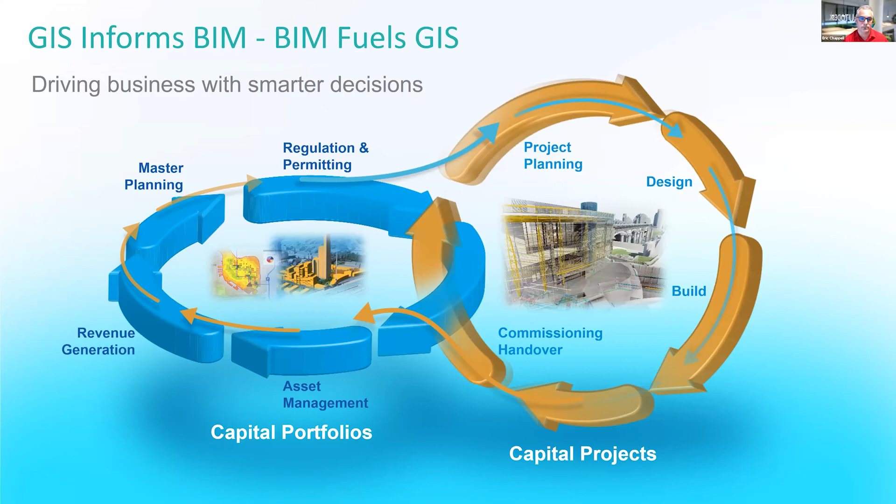Now let's talk about integrations between Autodesk and SBS. It's a different model because we have a tight and close developer partnership with SBS, and their products are built on Autodesk technology. For example, Automated Utility Design, AUD, has AutoCAD at its core, while Substation Design Suite has Autodesk Inventor.

These products also integrate with Autodesk Vault for data management. So for that reason, our solutions are naturally tightly integrated, and SBS can produce files and models that can be directly opened and edited with Autodesk products and vice versa. And we'll be actually showing that shortly.

I'm going to turn it back over to Matt now to talk about some of these integrations from the perspective of Esri. Take it away, Matt.

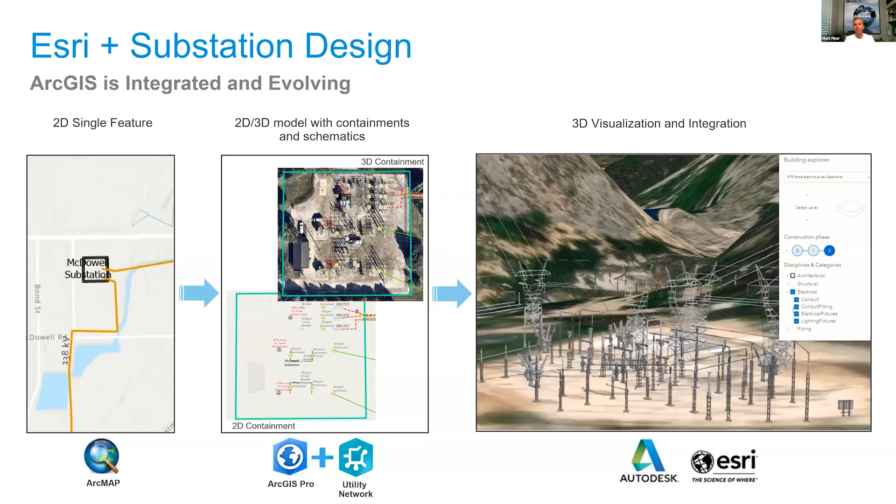This not only allows us to see the design in context to the surroundings, but you can also interact and toggle on layers and look at the different phases of the construction plans. This creates a whole new experience for GIS users and works for assets both above and below the ground.

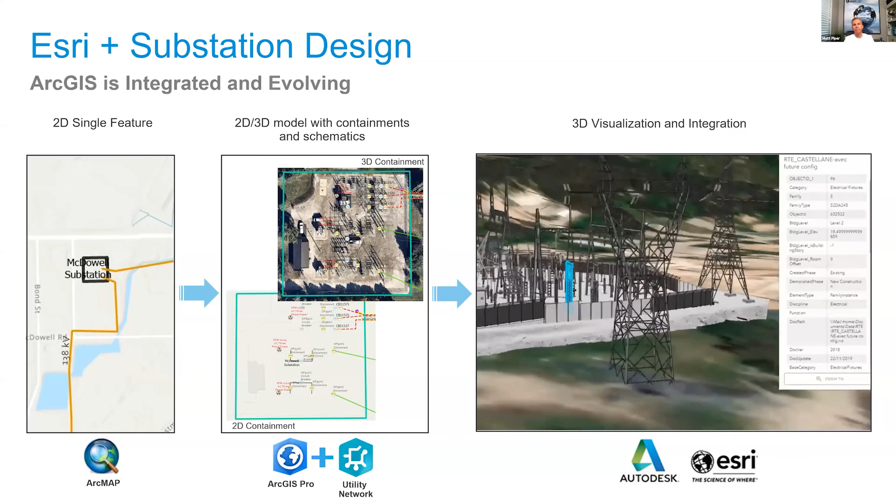One of the things I personally like is that it also honors all the attributes of your design, so users can select the assets and see the associated details, above and below the ground. What you're seeing is the two technologies coming together to greatly streamline many of these business substation and design workflows. It's really exciting stuff.

So we move to the next slide. What we have here is a simple example showing the work that can be done to bring these applications together. Autodesk has created connectors for Civil 3D and InfraWorks showing bi-directional connections. The result is that Autodesk solutions for engineering and design are now connected with Esri's ArcGIS Online and Enterprise solutions.

In addition, our work together has led to significant improvements in how we bring in Revit files through ArcGIS Pro, which is what you just saw in that 3D scene. Most recently, we're bringing in Civil 3D drawings in a much more powerful way, as we're now able to bring in the object, the attributes, and understand that Civil 3D BIM data in the GIS.

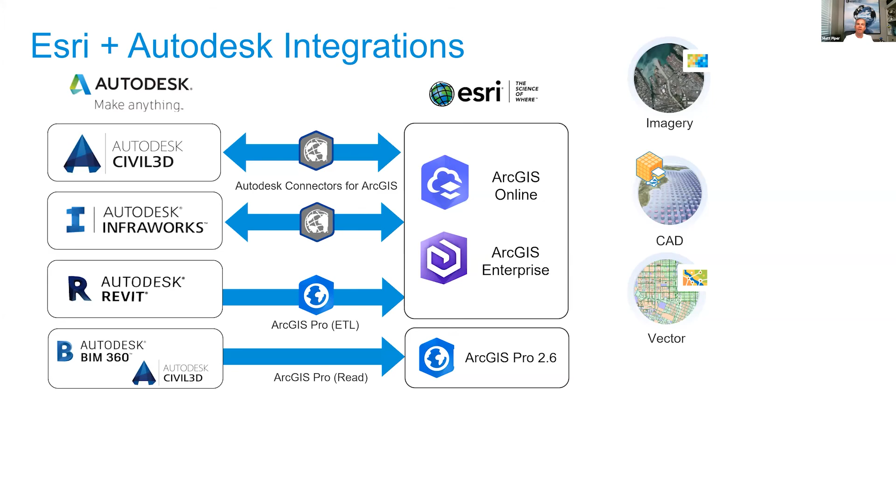But it doesn't stop there. If we look at the next slide, what's coming in 2021 is a new offering called ArcGIS GeoBIM. This creates a cloud-to-cloud connection between our two companies, giving users a direct connection between our two cloud platforms, opening the door for many powerful collaborations and productivity workflows.

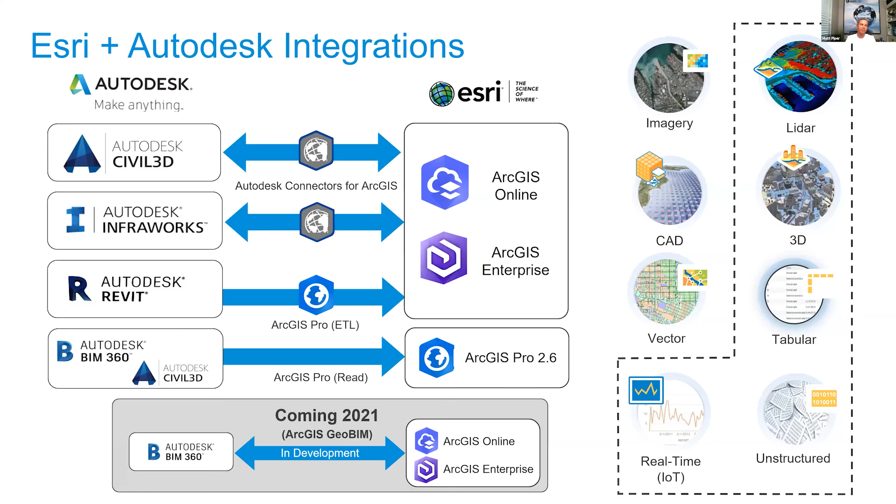So the next slide, we're just going to cover the integration that Esri has with our partner SBS as well. SBS is a partner of Esri, and they've extended the core capability to further streamline the design process as it relates to that utility network I discussed, and all the associated analytics and insights. Much of what our customers are asking for is about understanding the network, and more we are seeing customers look to understand it through 3D representations, this digital twin of what they see in the real world.

So I'm going to hand it over now to Dennis, who's going to take us through some more details of the SBS capabilities. Over to you, Dennis.

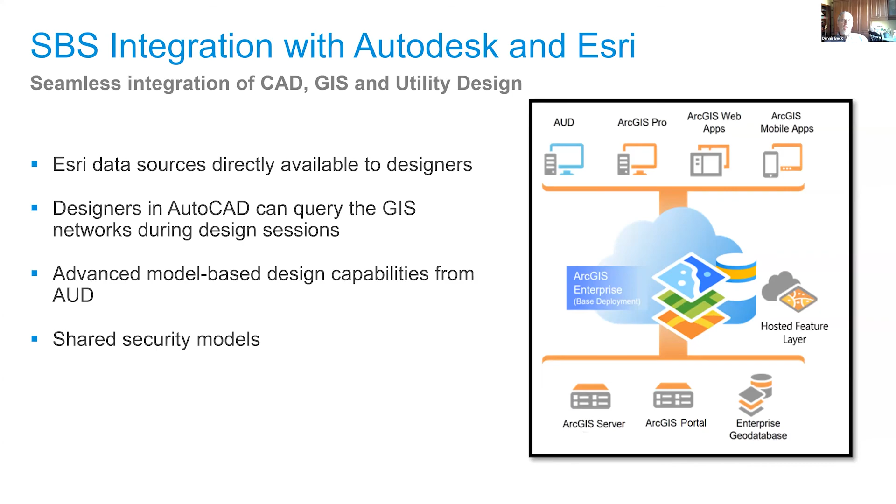And then coming out of this, very critical is also the ability to have the appropriate security and support for it. So the big question is, what does that mean for me? Well, once this information is available, it really opens up the door to a lot of things.

When Autodesk and Esri put this strategic partnership together, I know a lot of the interest was around smart cities and the urbanization happening globally. But from a utility standpoint, the data you have becomes very current and rich, supporting operational activities like dynamic networks and smart grid and those advanced network applications.

All will have a robust data representation that can support taking the utility business to the next level and enabling modernization. Coming out of this community, you've seen a lot about BIM. Esri has a very robust set of mobile capabilities, and all that gets much more enabled. When we look at the benefits of intelligent design and 3D modeling, which is what this session is all about, it really means taking better designs out to the field, having better construction.

And that's where a lot of the justification comes. If you can just shave a few percentage points off construction costs, if you can get your spend in earlier, you're making dramatic changes to the financial performance of your utility organizations.

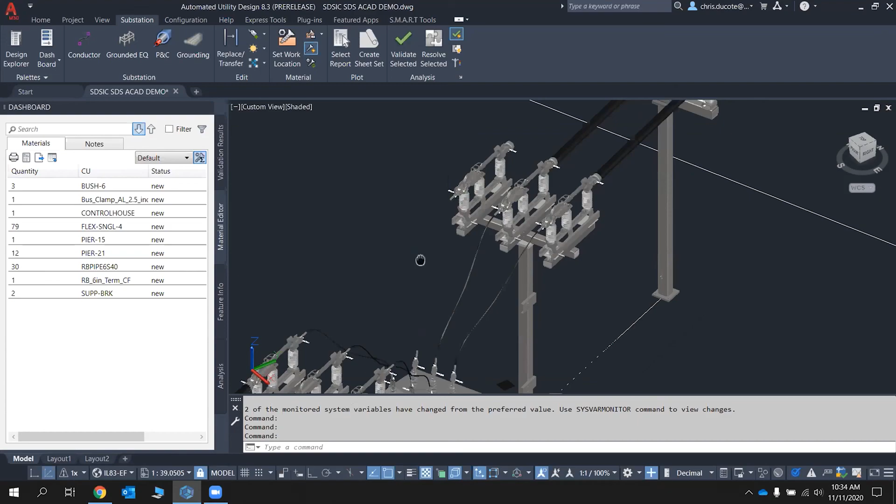This is SDS Physical for AutoCAD, what we're looking at here. This is our new product we've been working on. I'm just going to demonstrate a couple workflows here. This is where we're actually going to put the substation design together. So I've got a couple things left to do here - I need to run a flexible conductor here and a rigid conductor from the switch to that bus support stand.

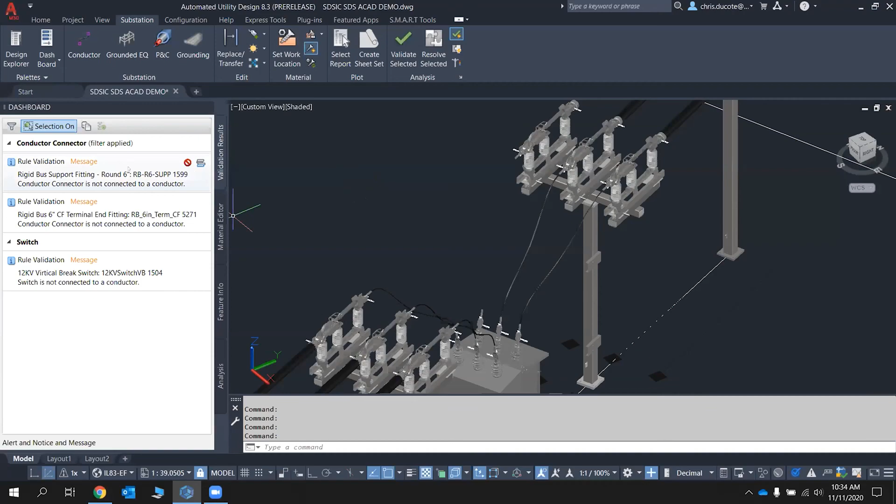Now you'll see here, I have a bill of material here that this is all model based. So once it's modeled and in the design, it's going to be counted accurately. Now part of the power of this is we have true connectivity. We have design checks that we can run. So what it's telling me here, it's picking up that there are open ends in the design - it's telling me that there are things that are not connected. So I'm going to go ahead and connect these.

So here I'm choosing my flexible conductor. We'll see it's created that conductor for me. Now notice also it's giving me a preview - it's picking up, it knows what it's connecting to.

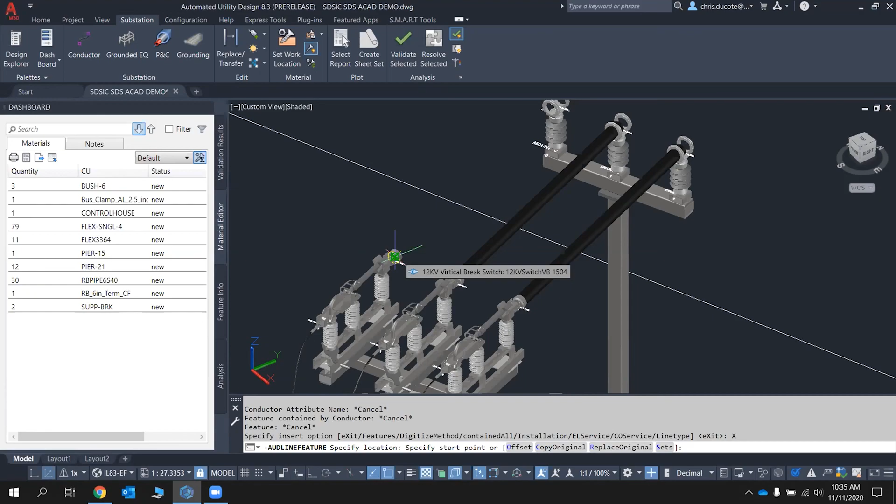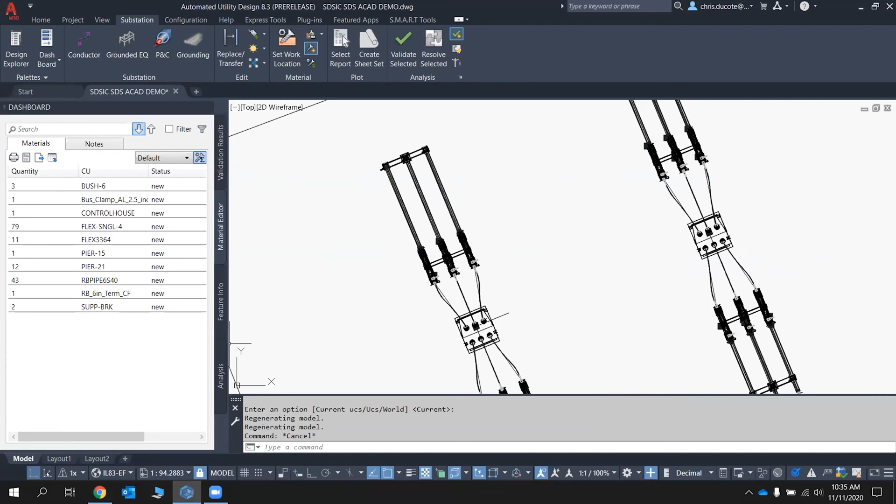And there we have our connection made. Now this can be done either in 2D or 3D, so I can switch back and forth from a 2D design mode and then back to 3D.

One of the powerful things here, which is going to feed into the rest of this demonstration, is using this platform, we can make it geospatially aware. So at the bottom of my screen, it's assigned to a coordinate system, so the design knows where it exists on Earth.

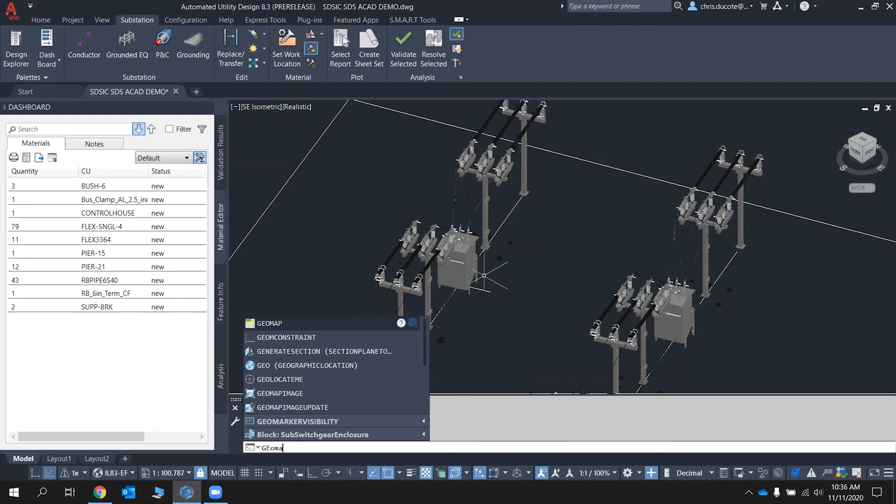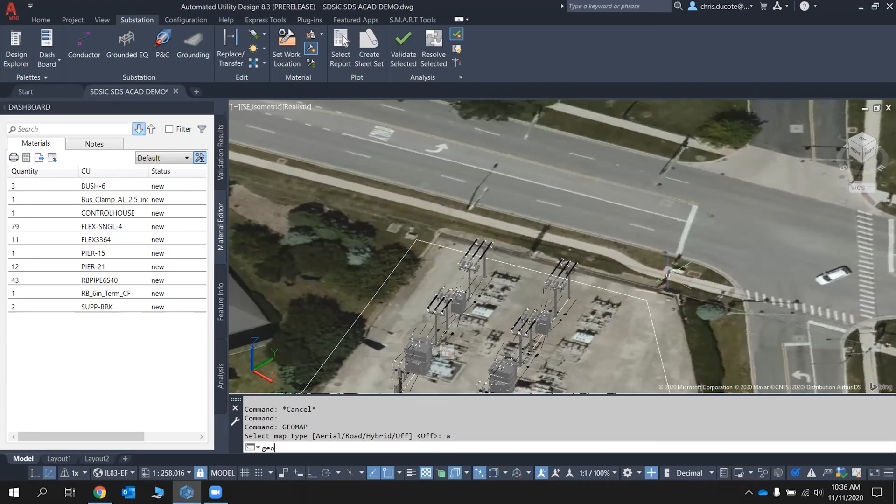As an example here, I'll go ahead and pull in some aerial imagery. It's really nice to have this integrated right into the product.

Now, once I've got my design to a point where I'm ready to begin sharing it into other platforms, for this demo, what we're doing is leveraging BIM 360.

What you can see here, I have BIM 360 synced to my desktop. I'll just go ahead and give that a quick save, and it's going to sync up through BIM 360, and we can go ahead and hand it on to the next presenter.

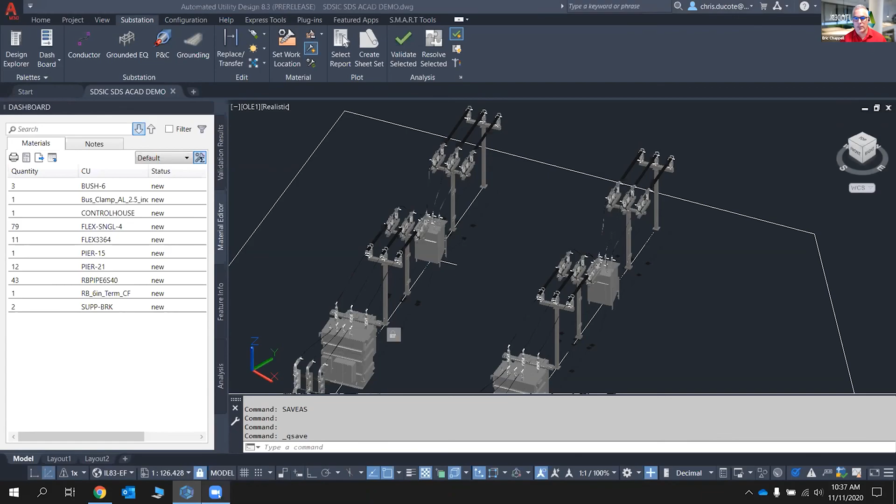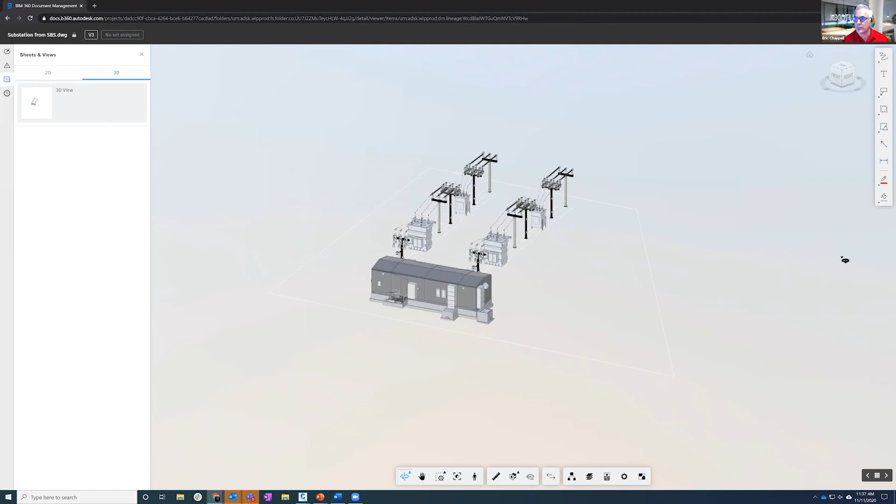I'm right here in my Chrome browser in the BIM 360 environment, navigating and viewing the model. If I were a project manager or some stakeholder in the project, I could review Chris's design here, maybe make some markups. I've got markup tools right here in BIM 360. I could make comments, I can create issues. There's all kinds of collaboration functionality here right in the BIM 360 platform in the browser.

So even though Chris and I are in two different companies and two different parts of the country, he was able to save that drawing up to the cloud, and I was able to XREF it into my civil engineering drawing.

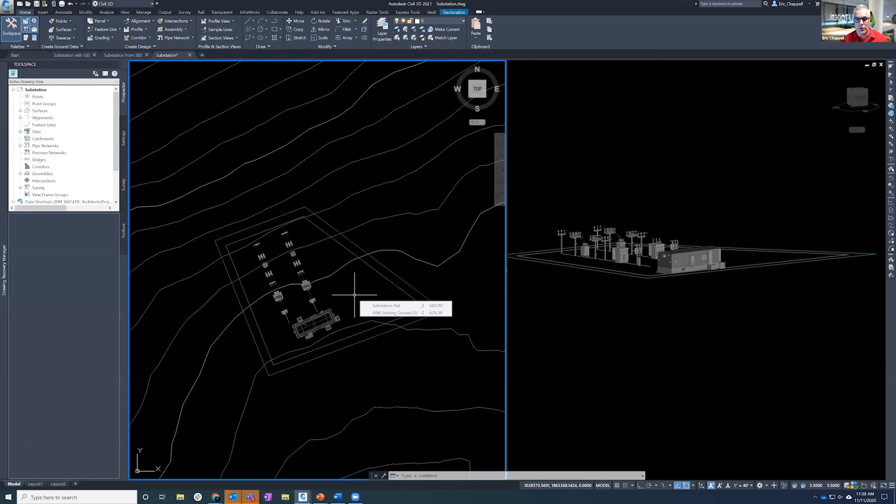Now, while we're talking about integrations, we've got the ability to, because of the tight integration, just open Chris's file. But I've also got integrations with Esri that allow me to interact with some of the data on that platform as well.

For example, I can open the Autodesk connector for ArcGIS, and that takes me right into ArcGIS Online, where I can grab any data that I have access to. The folks at Esri were kind enough to supply me with some data to add me to a group, and I can just grab that data and choose how I want to bring it into Civil 3D.

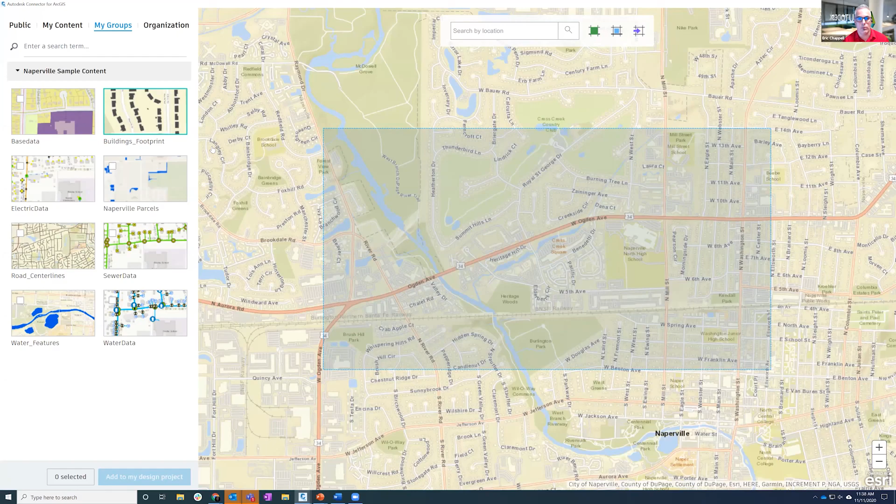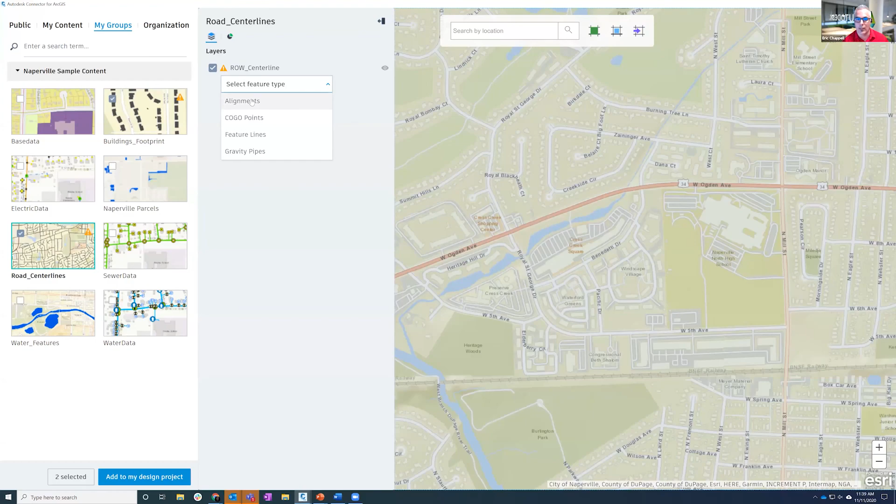For example, I can grab some buildings and bring those in as Civil 3D feature lines, or some road center lines and bring those in as alignments, and any number of choices. And when I do that, that information comes into Civil 3D and adds that context that I'm looking for.

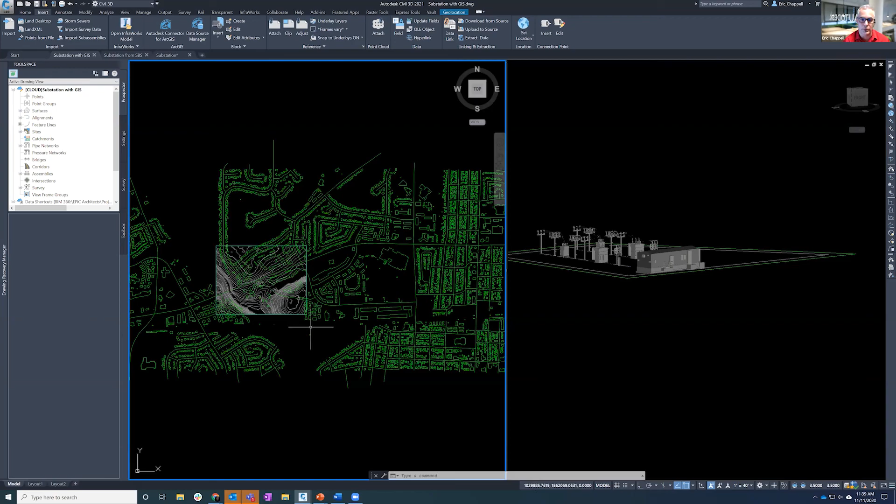As I mentioned earlier, we can use that connection, that integration with Esri, to build up a much more robust existing conditions model to kick off each project. So now I've combined data from a number of sources - I've got SBS's detailed substation design here, and I've got Esri's context in the form of the buildings and roads and whatever else I bring in.

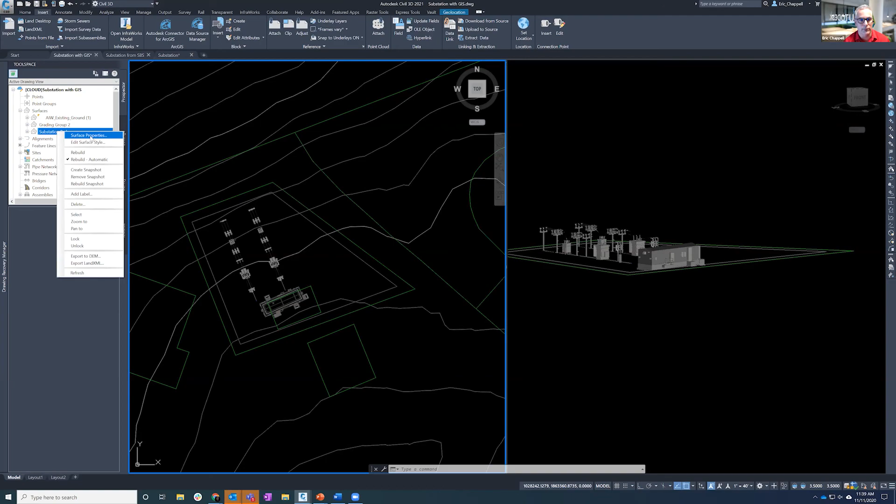Now I'm ready to maybe do some engineering design. As a civil engineer, I might take a look at this site and say it would be nice to grade this out and provide some grading for this. So I have actually already done that - I'm just going to turn it on here and let you see just a simple grading pad that I've created for the substation design.

So now this file is already in BIM 360, that's where Chris saved it to. I can just hit the save button, and now my civil engineering changes have been added and incorporated to the project to be used elsewhere.

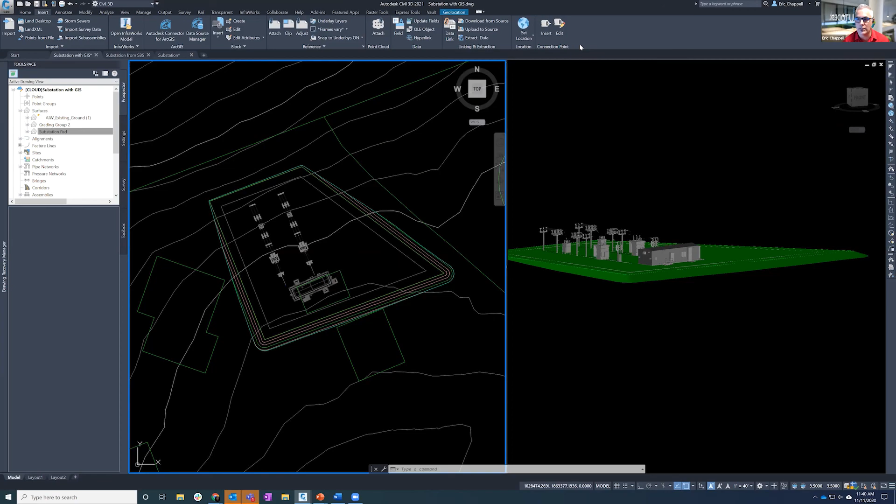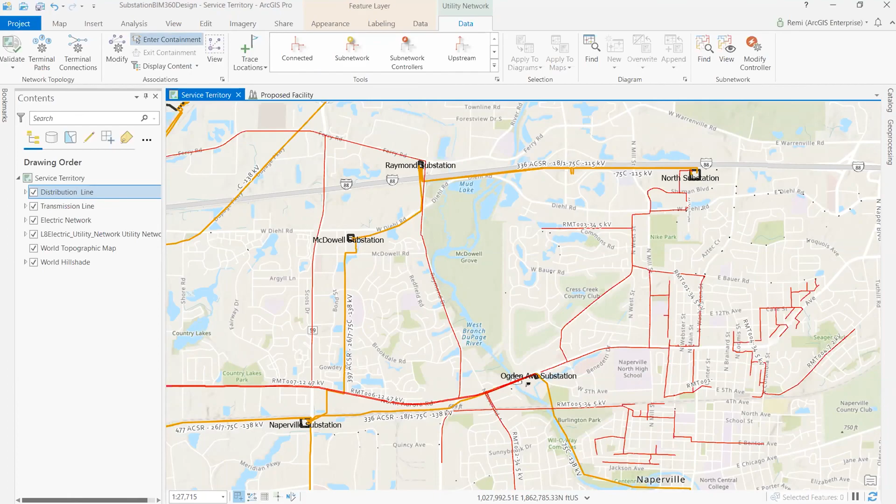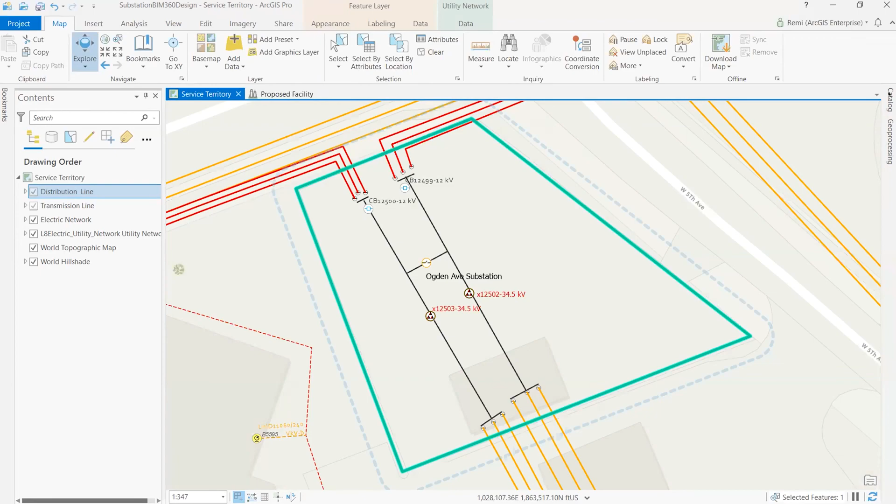So as Matt mentioned, GIS traditionally represents subs as simple features over a large geographic area. But with the release of the utility network, I can take advantage of our containment ability to see a higher resolution of details. Now, what's exciting to me as a former GIS supervisor for transmission, I used to have to convert to paper, or I would have a limited capability of consuming from BIM 360.

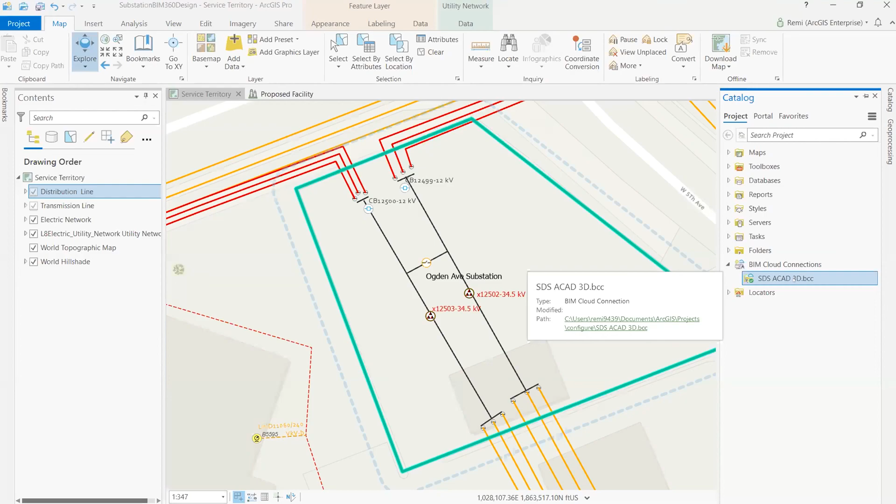But now we have BIM 360 adapters directly into our ArcGIS Pro, and we can consume that BIM directly into our operational models.

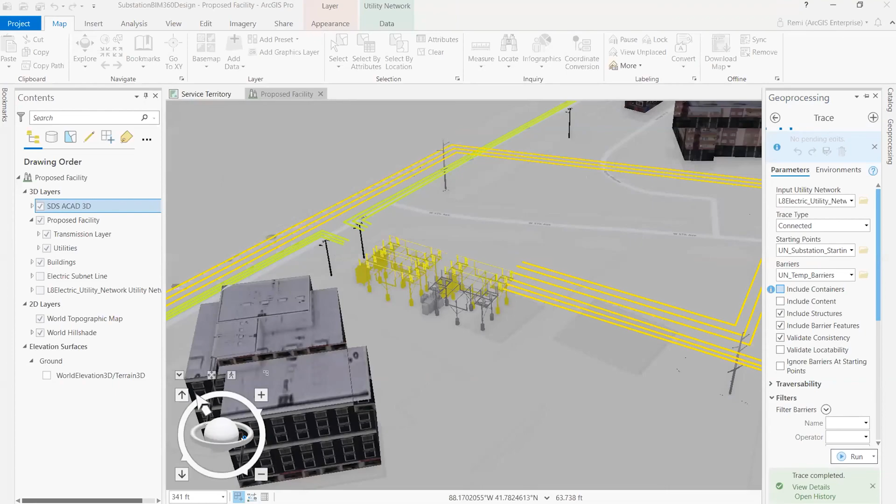And I can not only see the engineering, but I can configure my models to explore how I would operationally deploy the substation. For example, in this trace, I might isolate one of the transformers and breakers so that everything is feeding off of one transmission feed, with the second transmission feed used as a fallback. From a GIS perspective, it's exciting to have access to that integration and design, and be able to replicate and use those design features to see how they would operate in our systems analysis. So with that, back to you, Eric.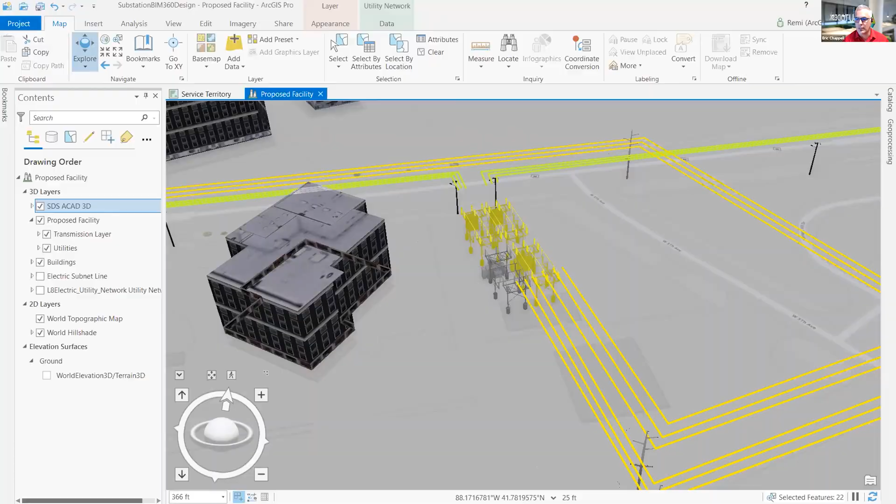So with that, I want to leave you with some final thoughts on what you've just seen. Autodesk, Esri, and SDS each have our specialties and industries of focus, but because we work together, you benefit. Through our partnerships, the integrations we've built make it easy to complete tasks and move project data between platforms more easily. I hope you found this session eye-opening and informative, and that you'll go explore the integrations we've touched on today, as well as the many others we didn't have time to show. I want to thank Matt and Remi, Dennis and Chris for participating in this presentation and this show of solidarity between our companies, which is really cool. It's not often you'd see the three of us presenting in one session jointly, so this is really exciting, and I really enjoyed our time preparing for this session and working with you. You've all been wonderful.